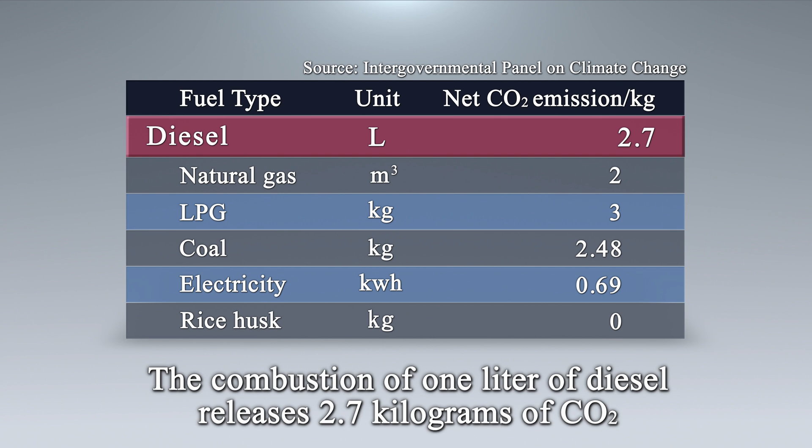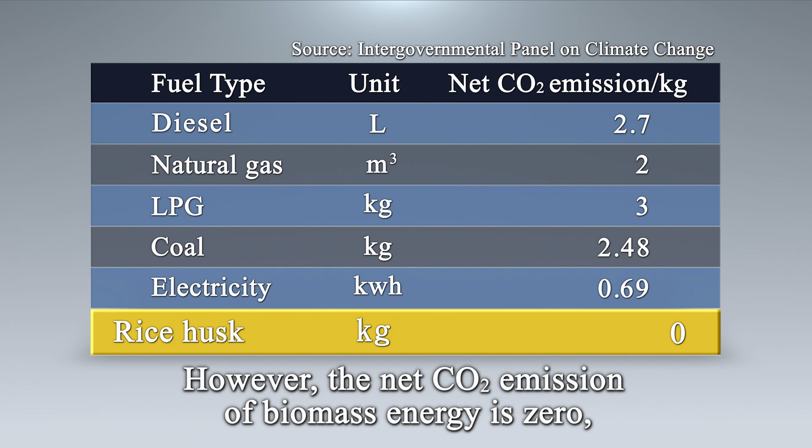To save the Earth and humanity, we must cut down on our fossil fuel use by adopting biomass and renewable energy. The combustion of 1 liter of diesel releases 2.7 kilograms of CO2. 1 cubic meter of natural gas releases 2 kilograms of CO2 after burning. However, the net CO2 emission of biomass energy is 0, which is eco-friendly. This saves money and reduces carbon emission.

In the past, we harvested manually and dried grain under the sun. We worried about the rain during harvest because if they were not dried in time, grain sprout and mildew would occur, producing aflatoxin, which is 68 times as toxic as arsenic and can even survive under 280 degrees heat. After consumption, both humans and livestock can get cancer.

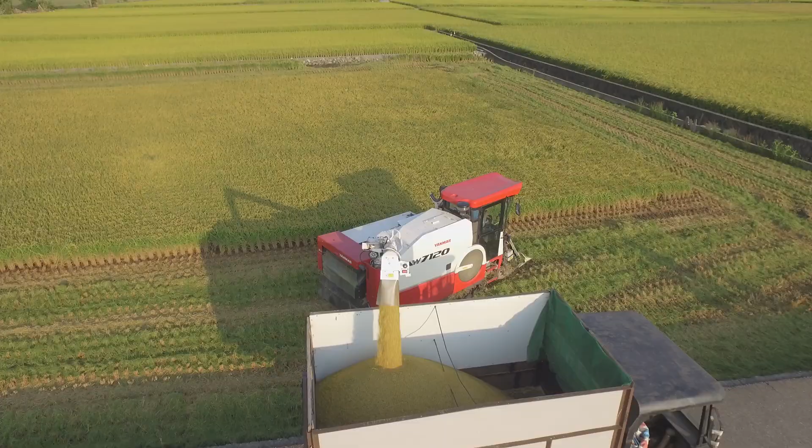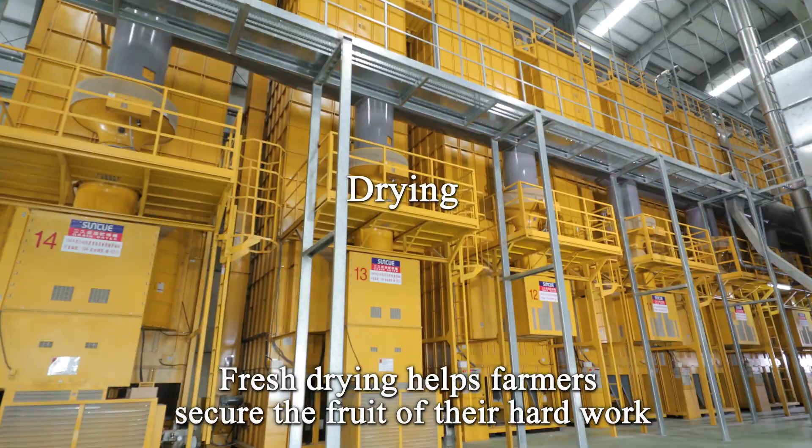Mechanized grain drying is the most important part of agricultural mechanization. Right after harvest, grain should be delivered into dryers. Fresh drying helps farmers secure the fruit of their hard work. This also allows everyone to have access to fresh and safe rice.

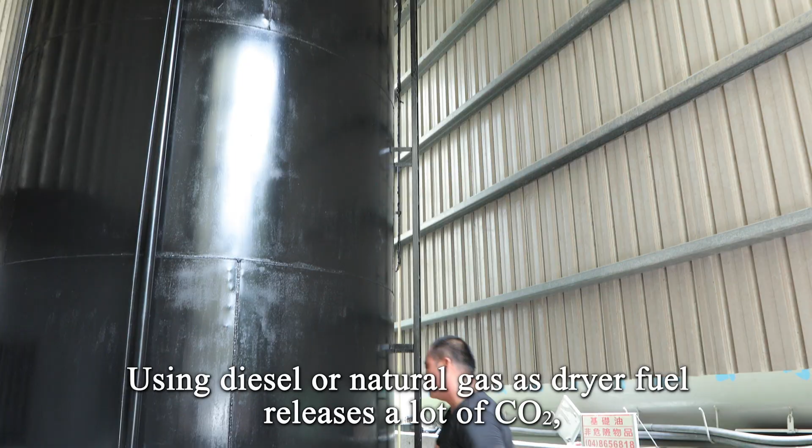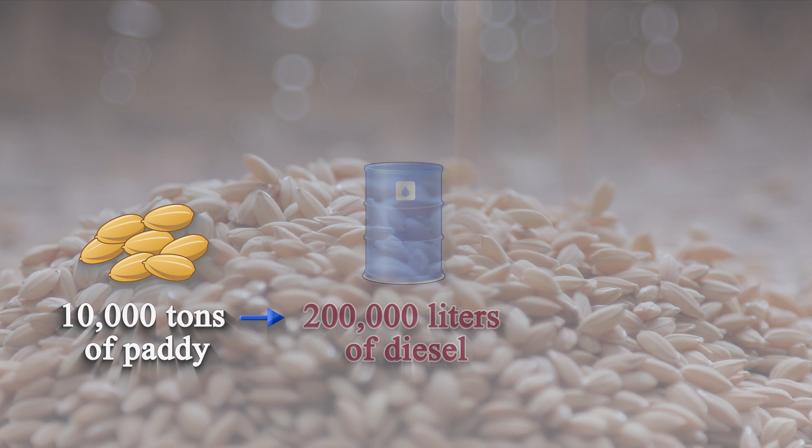Using diesel or natural gas as dryer fuel releases a lot of CO2, which causes global warming that reduces agricultural output and may trigger a food crisis. The drying of 10,000 tons of paddy requires 200,000 liters of diesel and emits 540 tons of CO2. Both diesel and natural gas are big expenses. The drying cost will again be out of control when fuel prices hike, which affects profits.

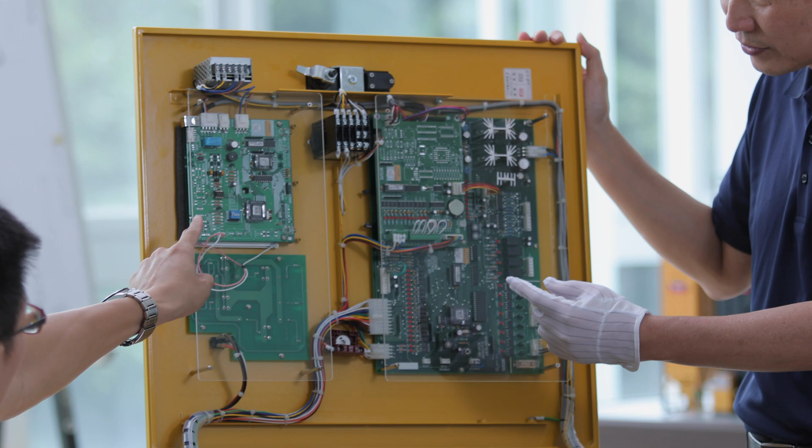To help farmers reduce drying cost and improve rice quality, SunCue has developed exclusive patented technology to replace diesel and natural gas with rice husks to dry grain.

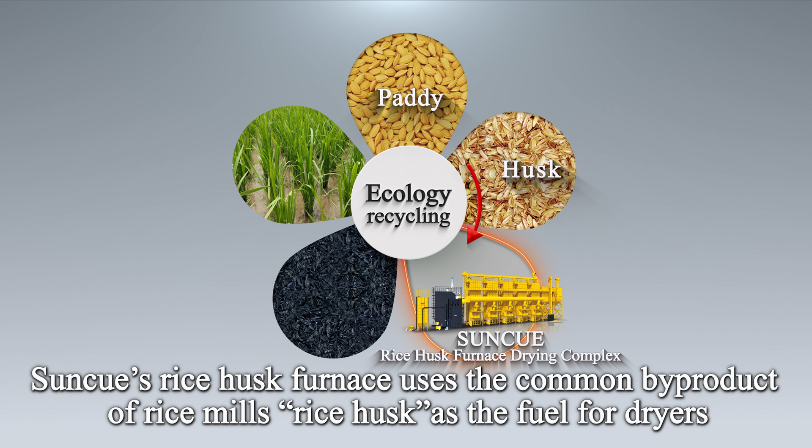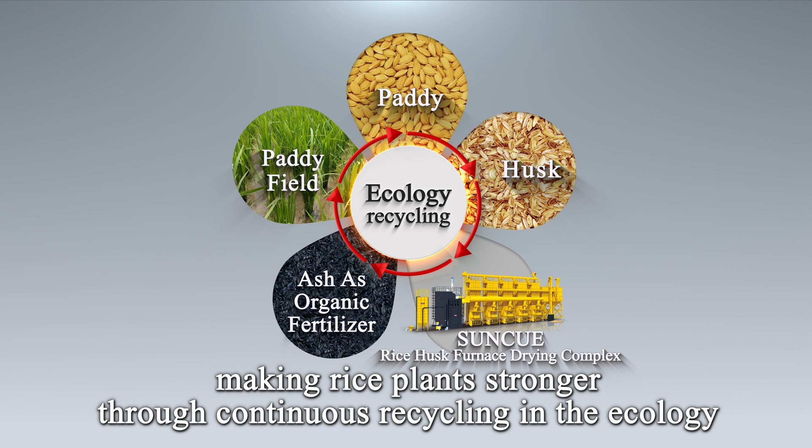Suncue's rice husk furnace uses the common byproduct of rice mills, rice husk, as the fuel for dryers. The ash after burning can be turned into organic fertilizer to return to the field. This improves farming soil, making rice plants stronger through continuous recycling in the ecology.

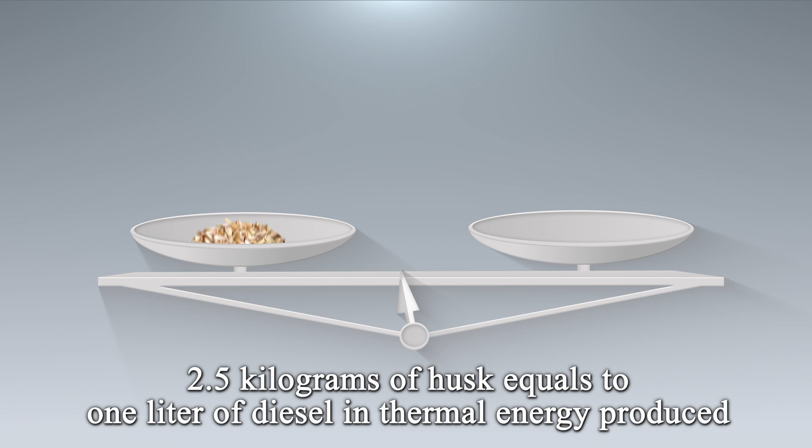Rice husk, originally considered rural waste, is rich in thermal energy. 1 kilogram of rice husk could produce 3,000 to 3,500 kilocalories after burning. 2.5 kilograms of husk equals to 1 liter of diesel in thermal energy produced. Suncue's complete combustion technology is able to apply husks from merely 1 ton of wet paddy to drying wet paddy of around 3 tons. This triples the efficiency.

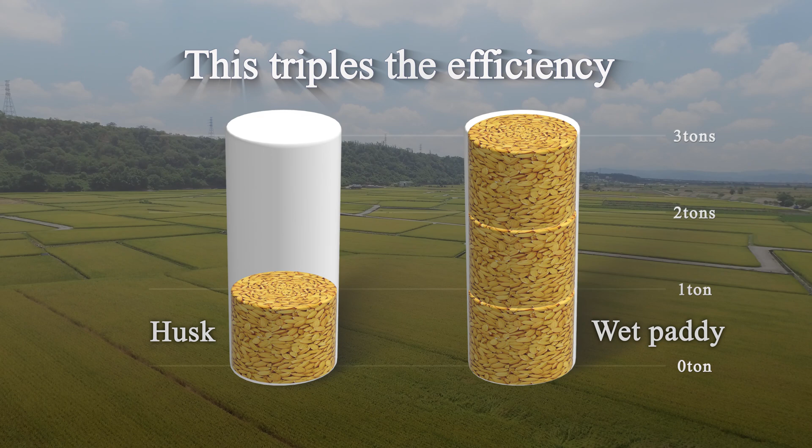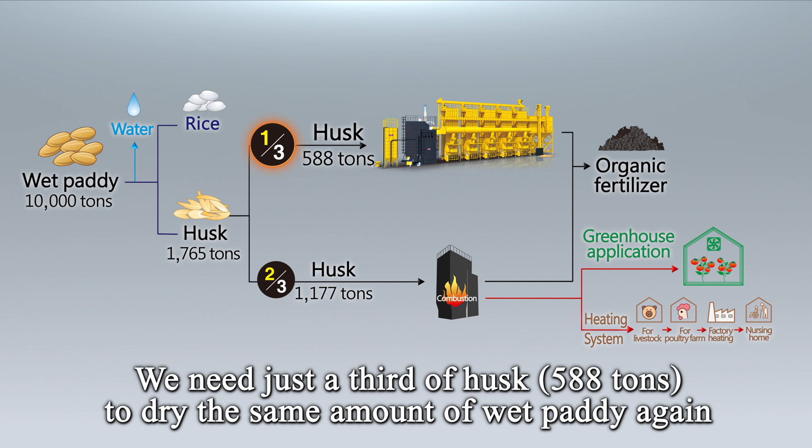10,000 tons of wet paddy produces around 1,765 tons of husk after drying and milling. We need just a third of husk to dry the same amount of wet paddy again. Surplus can be used as fuel for heating greenhouses or buildings.

The ash has an alkaline pH value of 8 to 9, which is capable of amending acidic soil impacted by chemical fertilizer or acidic rain. It is rich in minerals and trace elements, making it a good component for organic fertilizer that helps rice plants grow stronger.

Right after harvest, farmers bring wet grain to a Suncue husk furnace drying center. During loading, the furnace computer auto-calculates husk requirement and blows it into the furnace. Then the hot air passes through a heat exchanger and only clean air is sent to dryers.

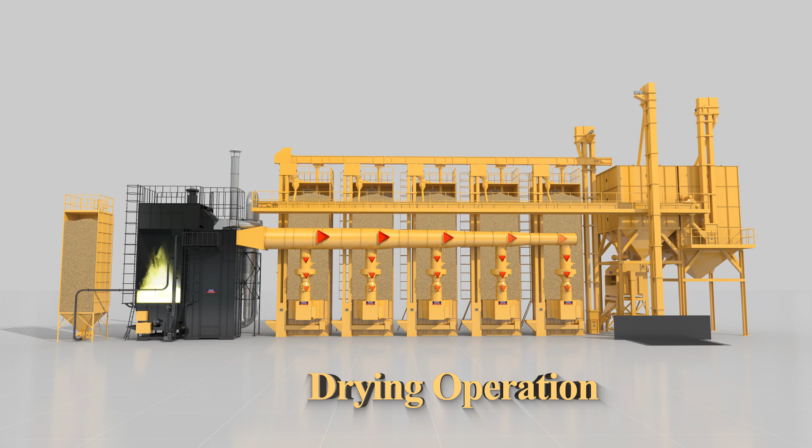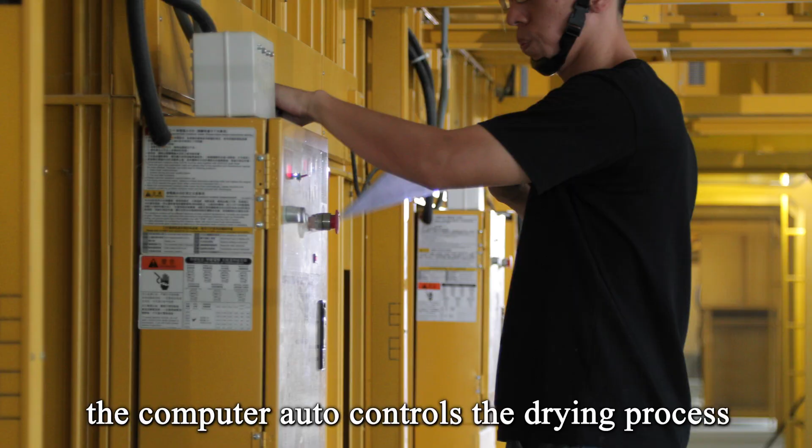Suncue rice husk furnace can connect up to 15 dryers at once. According to the number of running dryers and their temperature settings, the computer auto-controls the drying process.

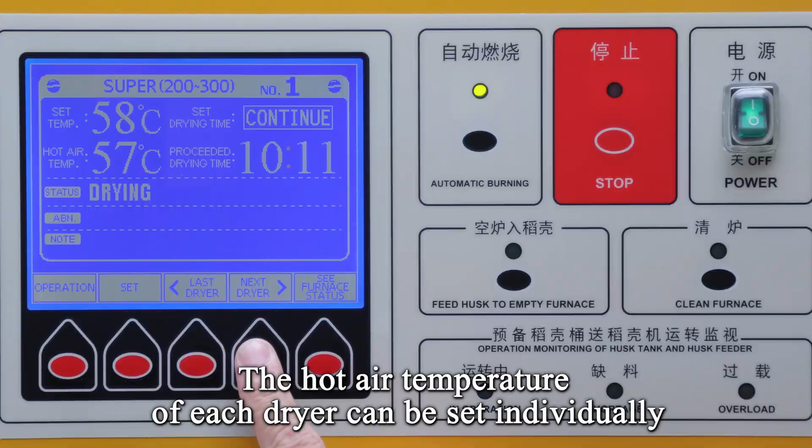The hot air temperature of each dryer can be set individually, and the furnace can control each temperature, plus or minus 1 degree within setting. This helps produce high-quality, high-value small package rice and makes seeds with high germination rate possible.

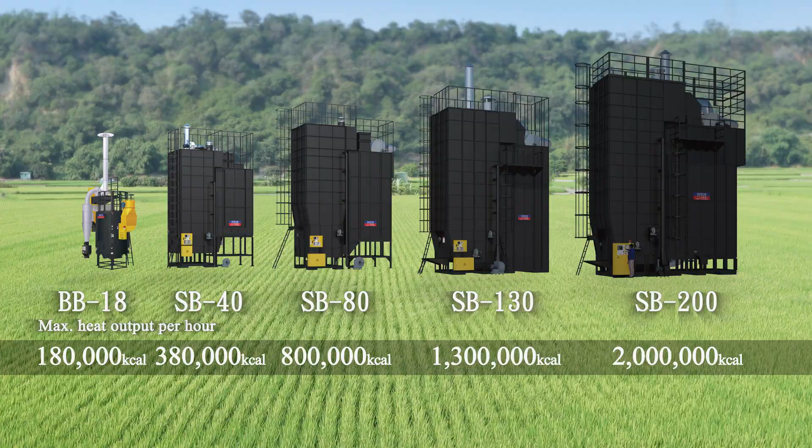Suncue husk furnaces come in various models. The fully automatic drying feature allows one man to solely process from dozens to even thousands of tons of grain per day. It is suitable for seed companies, grain depots, agricultural associations, and rice mills.

Phang Rong Rice Mill has long been contracting with farmers who raise ducks among rice plants in the paddy field. In 2012, we began to use a Suncue rice husk furnace and its grain dryers. They've not only helped us cut down on drying costs significantly, but increased the quality of our champion rice with natural fragrance. We are very happy with it.

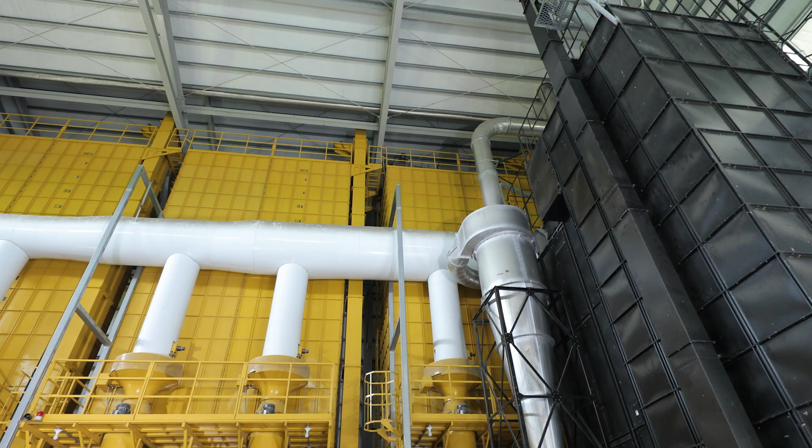Phang Rong Rice Mill has ordered 6 sets over time. Using its self-milled paddy husk as fuel to dry 30,000 tons of paddy and corn saves them 600,000 liters of diesel each year.

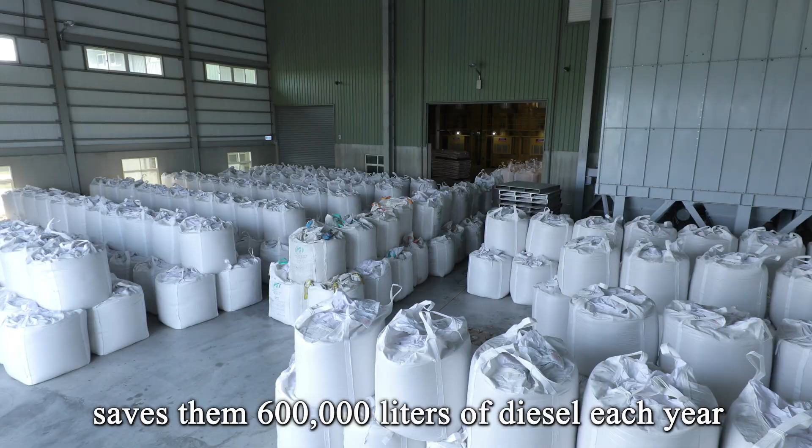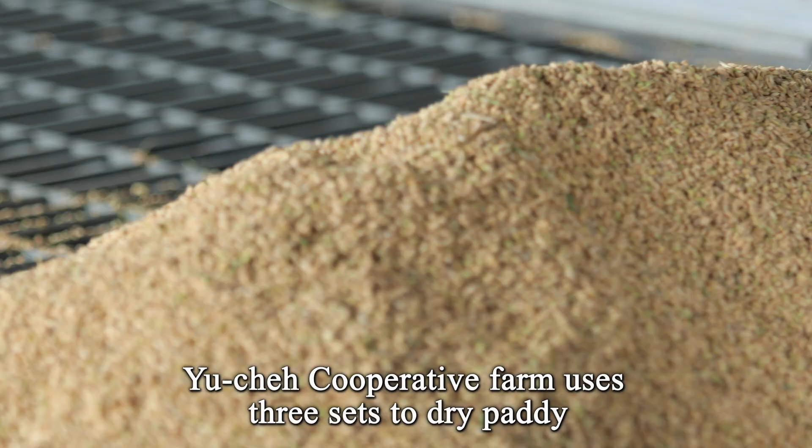Yu-cheh Cooperative Farm uses 3 sets to dry paddy, garlic, sticky rice, peanut, and longan. Versatile usage maximizes their return of investment. In addition, the farm's organic fertilizer plant enables ash to be reused in the ecosystem, which results in higher profits.

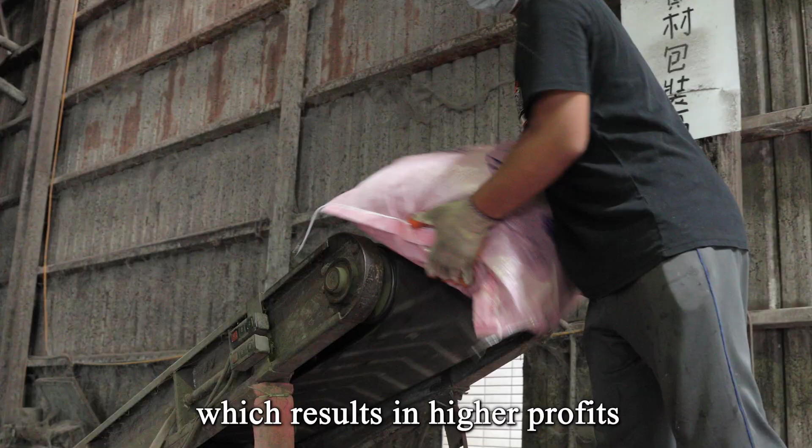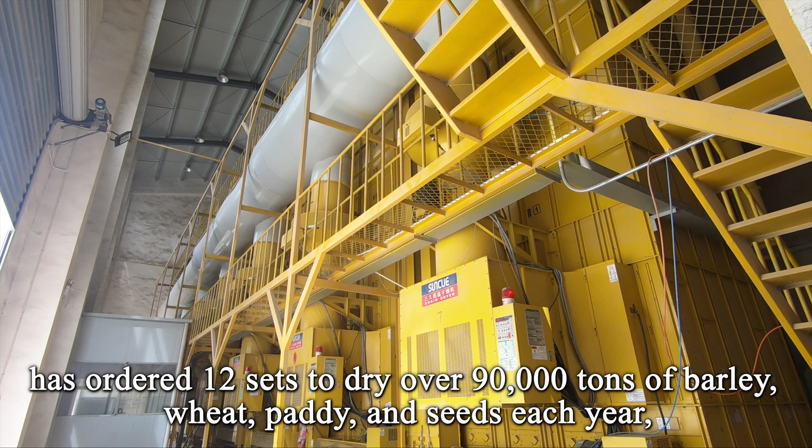Shanghai Farm, China's advanced green seed company, has ordered 12 sets to dry over 90,000 tons of barley, wheat, paddy, and seeds each year, saving 1.8 million liters of diesel as a role model of all green agriculture enterprises.

Food Corporation of India has ordered 5 sets, which are drying 60,000 tons of corn and saving 1.2 million liters of diesel per year.

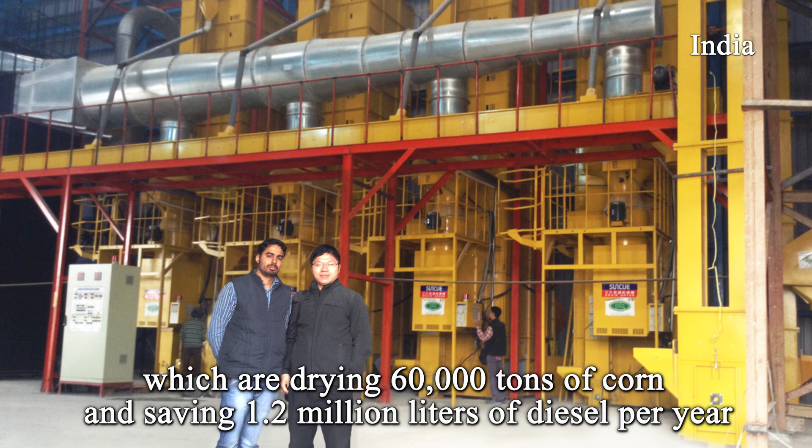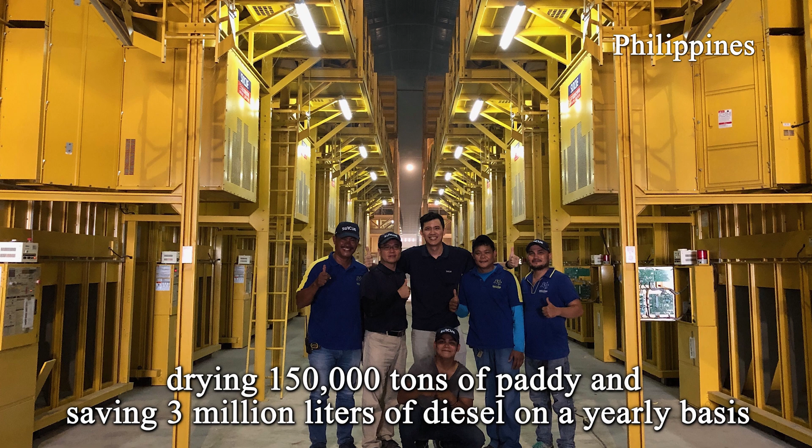This Filipino rice mill has ordered 7 sets, drying 150,000 tons of paddy and saving 3 million liters of diesel on a yearly basis.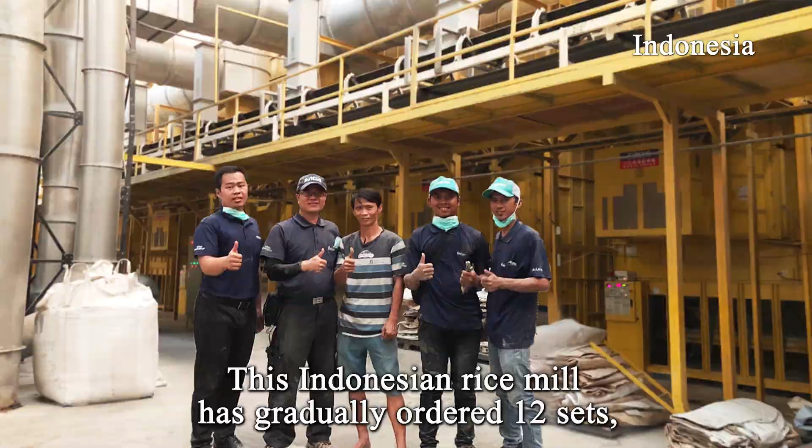This Indonesian rice mill has gradually ordered 12 sets, drying 1 million tons of paddy and saving 20 million liters of diesel annually.

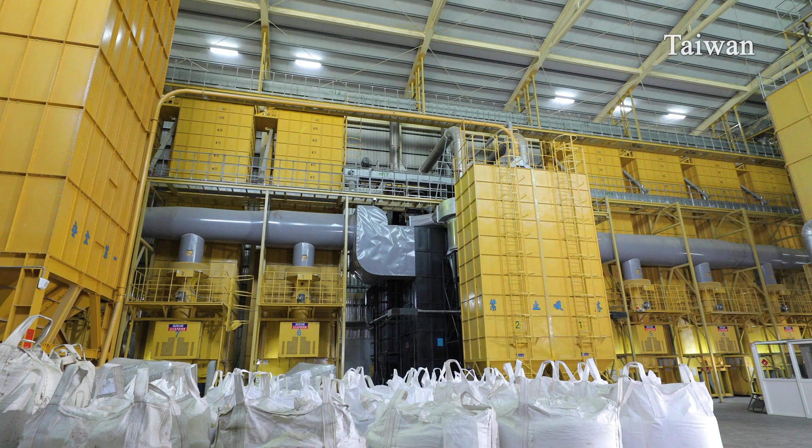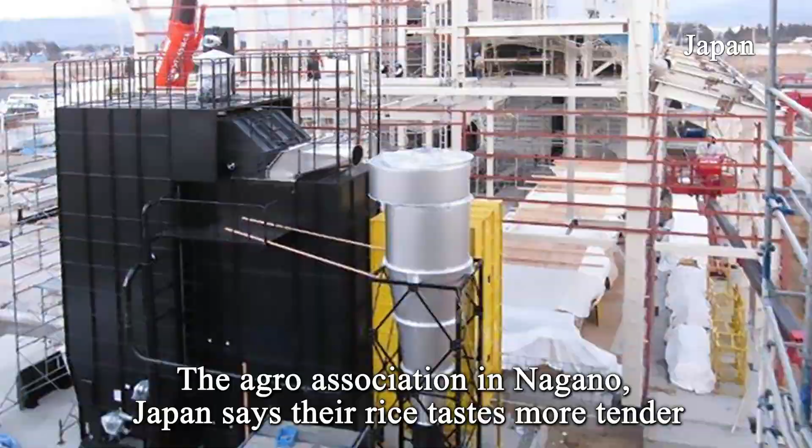Users worldwide have given positive feedback after using Suncue rice husk furnaces. Shilo Agro Association in Taiwan finds their paddy naturally fragrant. The Agro Association in Nagano, Japan says their rice tastes more tender. Prundle Rice Mill in Korea testifies that this is truly organic rice.

Naharacha Seed Company in Thailand dries 20,000 tons of paddy seeds per year. The higher germination rate, the higher seed prices.

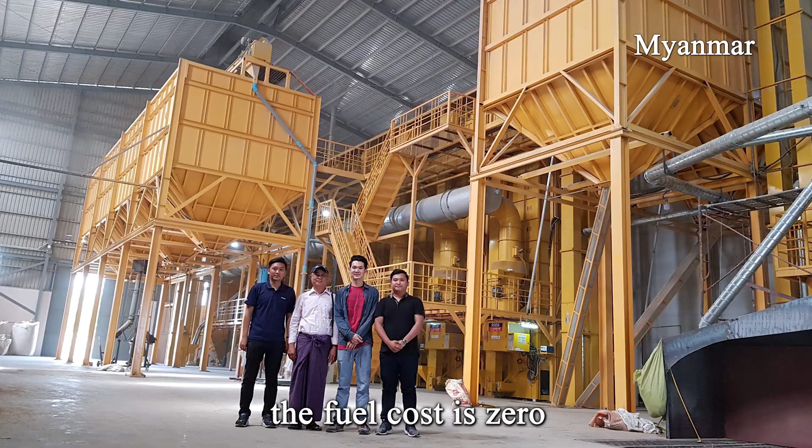By using Suncue's rice husk furnace with free rice husk, the fuel cost is 0. For drying 10,000 tons of paddy, the saving of 200,000 liters of diesel exceeds the profit of selling the paddy itself.

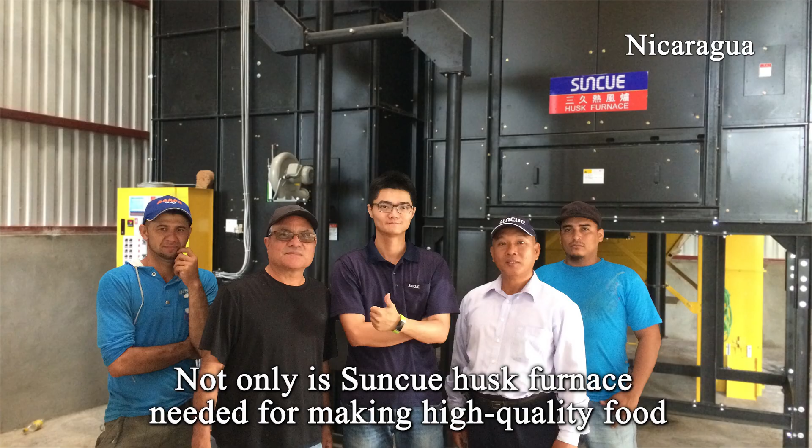Not only is Suncue husk furnace needed for making high-quality food, but for increasing competitiveness and cutting operation cost.

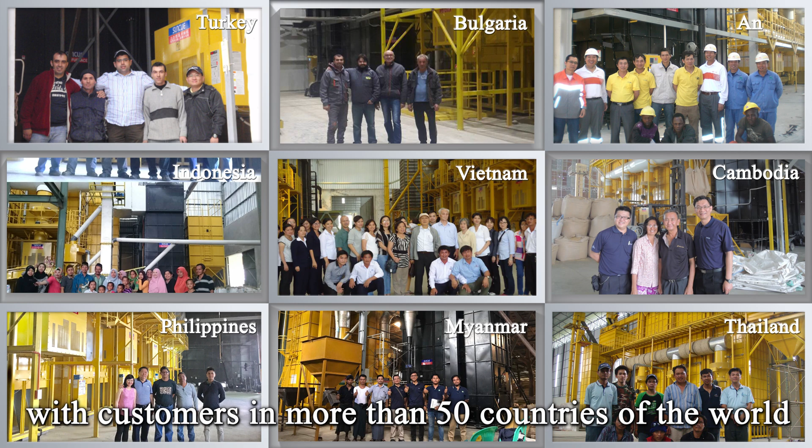Suncue is the only manufacturer exporting to Japan, Korea, Southeast Asia, Europe, and Latin America, with customers in more than 50 countries of the world that have welcomed it with great acclaim.

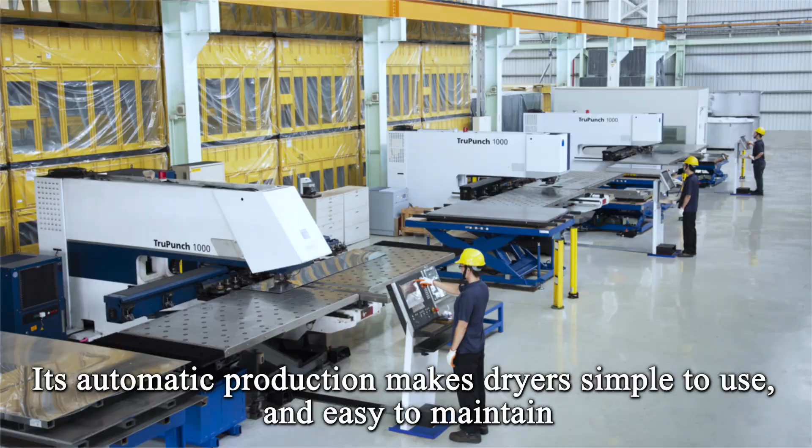Suncue, founded in 1966, has focused on its R&D to manufacture grain dryers for more than 50 years. Its automatic production makes dryers simple to use and easy to maintain. The goal of Suncue is to design dryers requiring no service.

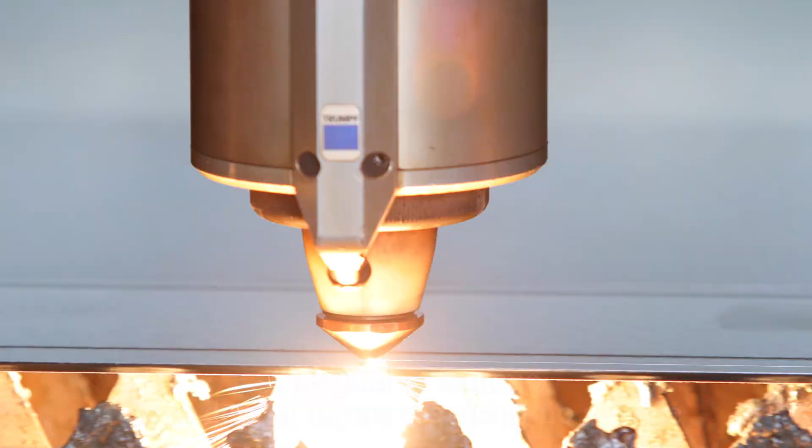Suncue has received gold medal at the IENA Nuremberg, Germany Gold Medal Award and Special Genius Award at World Genius Convention in Tokyo, Japan, and many other major awards.

The motivation of Suncue's continuous research and innovation comes from our values. Dao Xin is the heart of nature. It means to be concerned about human beings. We believe that if the starting point of a company is to make a great contribution and help society, naturally, society will give you good feedback in return.

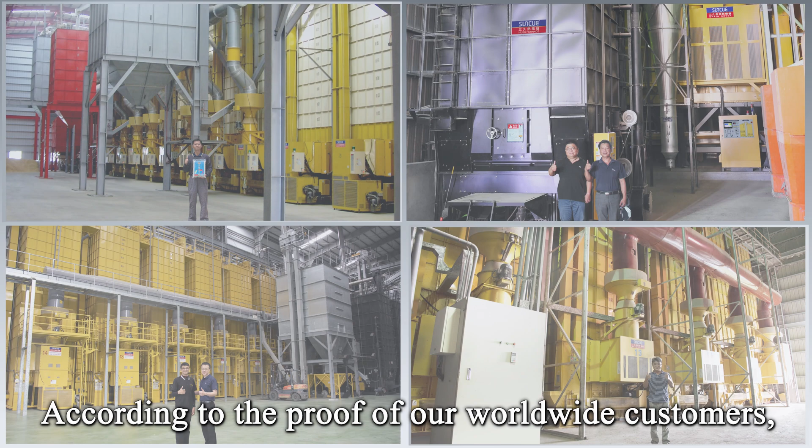According to the proof of our worldwide customers, Suncue Rice Husk Furnace can help improve rice quality and sharply reduce drying costs.

Let's move from petrol-based agriculture to the era of sustainable agriculture and work toward the common goal of giving our land a better future through protecting the environment. Suncue Husk Furnace Grain Drying Center.